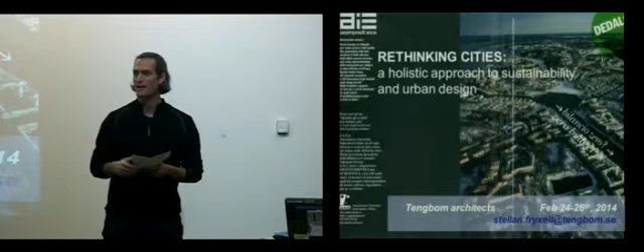One of the premier projects that many of us who do urban design and sustainable urban design look at is the Hammarby project, south in the southern area of Stockholm, and he'll be talking about that today. He's been involved since 1997. The project's still somewhat ongoing and has been nationally and internationally awarded, and is one of the benchmarks of how you do sustainable urban design at a kind of district level. So he'll be talking more about that today.

He's worked throughout Sweden, Norway, the UK, and is doing work right now in Russia, or has done work in Russia, and is doing work right now in China. He's the editor of a white paper on rethinking cities from the International Federation of Consulting Engineers. I think he'll be talking a little bit about this. An unbelievable, impressive list of awards, which I will not go through here, but national and international awards.

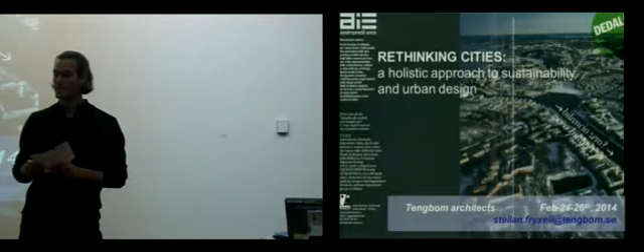You turned on the light.

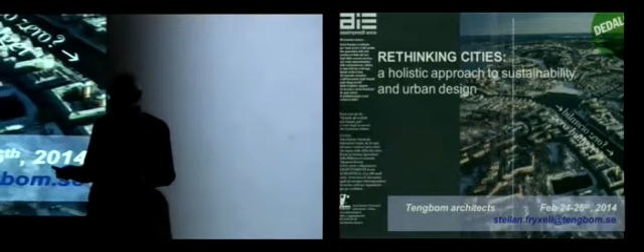I'm going to run through a presentation with slides about Hammarby, but also about what we are calling the urban toolbox, and a little bit about China, and we'll see if I can keep this together or not. But anyhow, it's a lot of slides.

This is a front page of an Italian magazine. I think it's a contractors magazine. And it's about Hammarby. And this is the nice poster. I'm very proud of this one.

A few words about Stockholm and Sweden. We are high up in the north. And as we are high up in the north, we have to plan. Otherwise, there will be no Swedes. So we are at the level of Anchorage or something. So it's a difference from here.

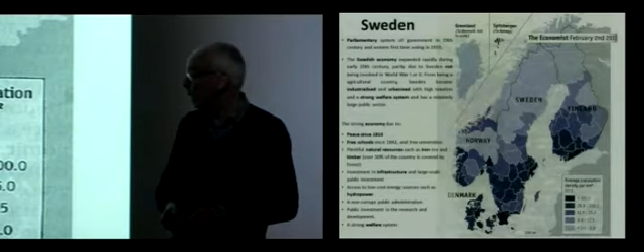Sweden is fairly large when it comes to area, has 9.5 million inhabitants. Almost 2 million inhabitants has immigration background. And there's one thing to say about Sweden: we have had peace since 1814. This is remarkable. This is lucky. We have natural resources, forests, mining, etc.

And Stockholm is located here. I'm coming from Tengbom Architecture firm, which happened to be the oldest firm in Northern Europe, as maybe there is a UK firm older. We are founded in 1906. So it's taken a while to become 550 architects.

Professor Tengbom designed a lot of prestigious buildings in Stockholm, and one of them is the concert hall of Stockholm, where the Nobel Prize ceremony is every year.

The biggest project Tengbom is working with is this hospital project, New Karolinska, which is the biggest hospital project in Northern Europe, and we do 50% of the design. And that is together with the other company, White, which is our size.

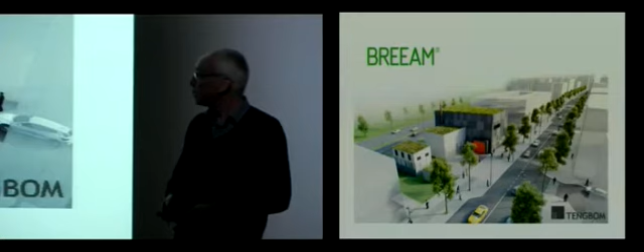I'm working as an architect and urban designer, and I'm responsible for the design of this little industrial building, which is a BREEAM certified building. It contains equipment for vacuum transport of garbage, and it has a green wall, for instance. It's a lot of paperwork with BREEAM, which is British, but there is no similar system in Sweden. This is a plan showing the equipment we are keeping in this building. It's under construction, so that's one side of sustainability.

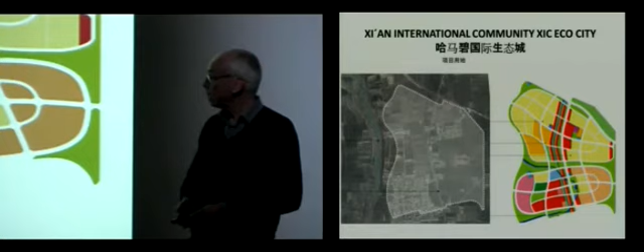I'm working with this project right now in Xi'an, the first capital of China, the terracotta city. It's 2 square kilometers big, the same size as the Hammarby project. I'm engaged with an organization working on the SymbioCity concept, which is another way to express sustainable city. There are many ways to express it, and there are brochures you can download under symbiocity.org in English.

I'm a member of the International Federation of Consulting Engineers Committee on Sustainability. FIDIC is the organization, and it organizes companies in 95 countries. We have done a report about sustainability called Rethinking Cities. What we are saying is cities are very important and can contribute to the climate issues we are facing.

Why rethink cities? There's a lot of figures about cities, so I'm not going to tire you with all of them, but a few anyhow. Almost 200,000 people are moving into cities every day globally, over 40,000 only in China. Cities are much more on the agenda, and we have a lot of problems with this. Cities cover about 2 or 3% of the land area, but use 75% of the energy and emit 80% of the carbon dioxide, which is a problem, but also a possibility to organize cities better.

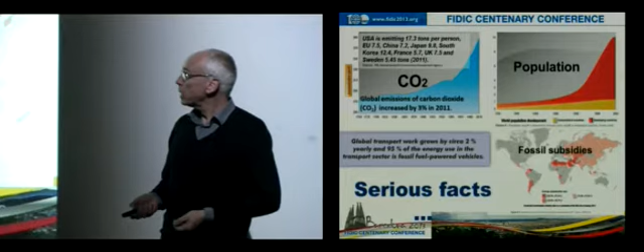Carbon dioxide is still growing despite the discussion we have. The United States emits a little bit more than 3 times more carbon dioxide per person a year than we do in Sweden, and there are reasons for that—it has to do with generation of electricity, but also with cities. I'll come back to that. Sweden emits about 5.45 tons per person a year, which is too high, but internationally it's low. China emits 7.2 tons, UK about 8 tons, etc. Greater Stockholm is emitting about 3.4 tons or something, but you can't compare a country with a city.

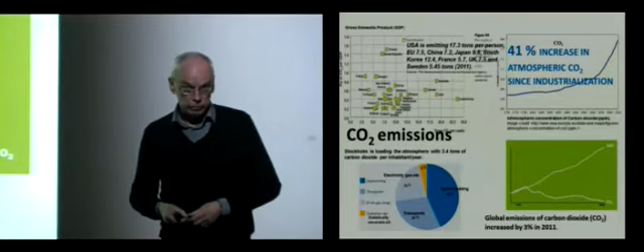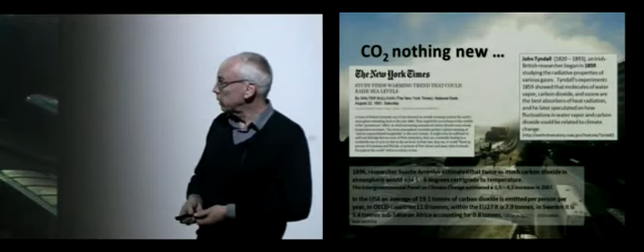This focus on carbon dioxide is new on the media agenda, but it's not new at all, really. In 1859, a British-Irish researcher started to talk about a connection between carbon dioxide in the atmosphere and the temperature. There was an article in a magazine in London in 1896 by a Swedish researcher about the connection between carbon dioxide growth in the atmosphere and the temperature. He overestimated the rise of the temperature, but still he had some points. This is an article I found on the internet, from the New York Times in 1981, saying a study finds warming trends that could raise sea levels. So this is nothing new at all.

How much oil do we have? When we started the Hammarby project, which I'll come to later, a barrel of oil cost $20. Today it's about $108 or $109. And ten years from now, what do I know—it would probably be $200 or something. So we can't rely on cheap fossil fuel, even with fracking.

I read this, and it's not very difficult to read—it's the IPCC report from September or October. It has a lot of facts about this. I can recommend it.

Another thing that has to do with cities: infrastructure investments are going down in many countries in Europe, including Sweden. I don't know about the US, but there might be the same thing here. At the same time, infrastructure can help us work better with the climate. This is what the UN Environmental Program calls planning resource efficient cities—that's their approach. Symbiosis city, sustainable cities, smart cities, resource efficient cities.

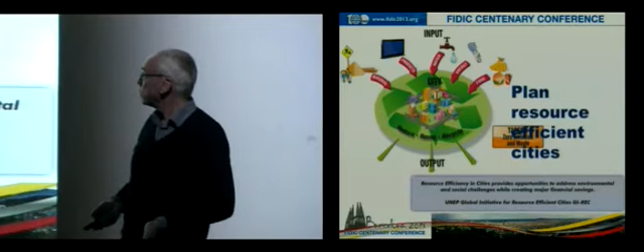But Sydney and Melbourne and other cities are very much into fossil fuel and emitting carbon dioxide. It's very beautiful to have a house of your own, two cars, and almost walking distance into the CBD. But that's not possible, not for many.

The FIDIC report, the Rethink Cities, and the work that we are doing in Sweden, we could call it a holistic and integrated approach to planning, where we combine urban design, infrastructure development and coordination, and environmental performance. I'm going to show what I mean with that.

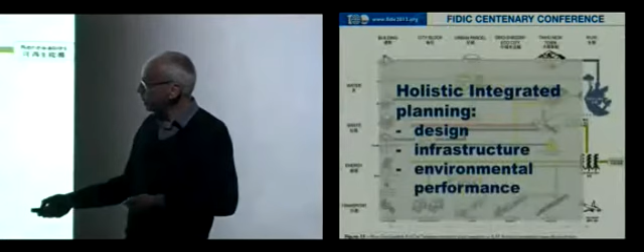If we're talking about sustainability, we have the ecological, social, and economical functions. We know that. And if we look first to the ecological one and to cities, I have a list of 10 different toolkits here. That's the urban function in itself, not only the building, whether we have green buildings or not. It's the urban function. It can be efficient, it can be beautiful, it can be energy consuming, whatever. Cities are very different.

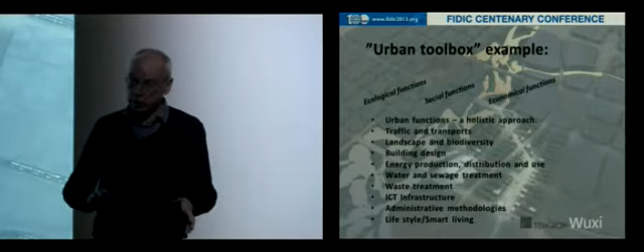Traffic and transport, that's obvious. Landscape and biodiversity has very much to do with urban function. Building design, we're working a lot with this, but in Sweden we are renewing the building stock with new buildings at 1.5% per year. So it's going to take many years to renew it all. Of course, we are refurbishing buildings as well.

So to do green buildings is not enough, we have to work at this level as well. Energy generation, distribution and use, water and sewage treatment, where sewage can be a resource, waste treatment, information communication technology - there's a strong movement from companies about this right now, administrative methods and lifestyle and smart living. That's 10 different items in my urban toolbox.

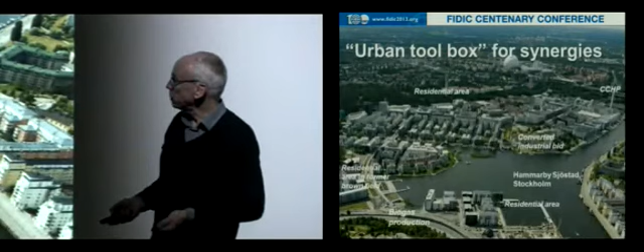I'll give you some examples. Hammarby, I'm coming back to that. This includes more than nice housing, like green bridges, biogas, etc.

Which is interesting. Building design, that's green building, it's obvious. The CH2 building in Melbourne, which houses the planning department of Melbourne, is using like 15% of a normal office building.

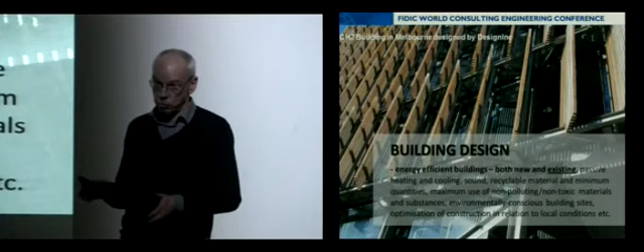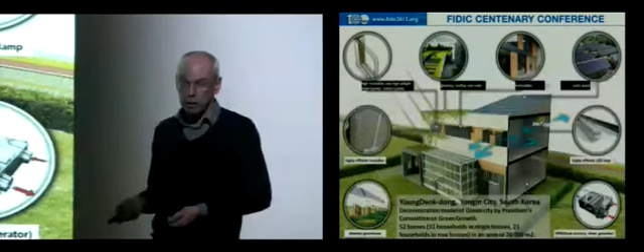This is from the President's Office of Green Growth in South Korea. BedZED in London is similar to this, same theme. There is a lot of rating and certification tools.

I mentioned BREEAM, you've got LEED here. There are about 250 or 300 of those around the globe, which is problematic, and sometimes they are very complicated to use. But they bring up those questions into the boardrooms, which is very important.

And BREEAM is the biggest one, and then I think there came the French one. LEED is the most well-known one. And then we have also good architecture - this is a Danish example, it's a part of the toolbox.

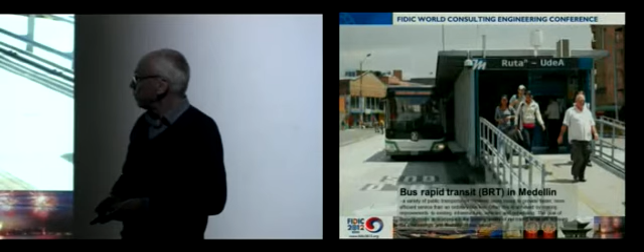Traffic and transportation and public transportation - this is the metro system in Stockholm, running trains on green electricity. This is a BRT system, you've got it here as well.

And this one is from Medellin, the former drug capital of Colombia, it's a nice city today. And this is from Santa Monica, light rail under construction from Colorado Avenue. It's very nice to see that.

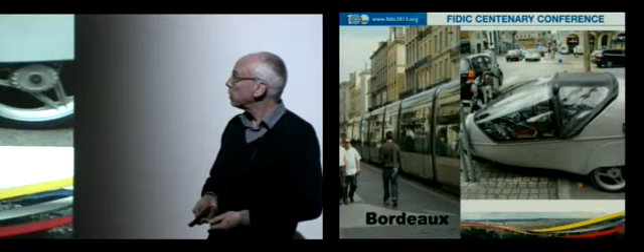And many examples coming to vehicles, there's many examples. This is more for fun because there's two bikers sitting in here. So it had been good yesterday where we were biking around.

And a lot of vehicles. This is also from Bordeaux. This is a Renault. This bus is charged with the power at the end stops, stops there for 10 minutes, and then we can make it to the other end stop. So we're going to see more of this.

This one is running on biogas from the former city dump in a small town in Sweden.

Bicycles, that's central here in Eugene. This is from Amsterdam.

I'm impressed of China in many ways, and one is the proportion of electrical two-wheelers. There's many more than it's possible to see in the United States or Europe. And also, it's one reason they are popular - you can charge this in your office and make your employer pay for the fuel. This one cost about $200 or something if you buy it in China.

Bike sharing. I don't know if you have it here. Yes, yes.

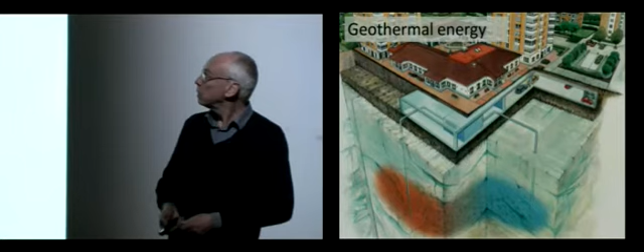Back to China, back to Duyun in southern China. This is from my hotel room - solar thermal panels all over. You can't find a country in a Western country with as many solar thermal panels as you can find in China. It's very impressive.

Water and sewage. This is a plant in Stockholm. This is many other places, also in China, where the sewage is used for biogas.

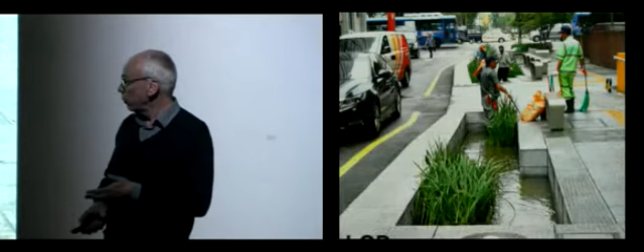Local treatment from Seoul. And this is Melbourne, the circulation of grey water.

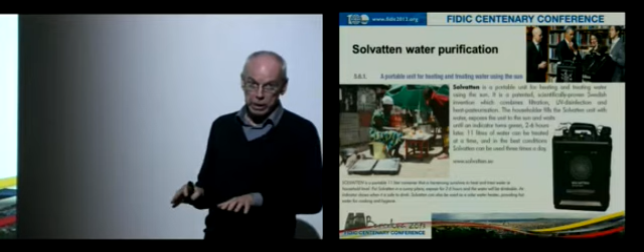This is an interesting innovation. Mr. Obama, he visited Stockholm a few months ago. He asked if he could visit Hammarby, but out of security reasons, that was not allowed. But he didn't see the system, he saw products instead. This is a small container that is purifying water into drinking water using the sun.

This is Swedish Prime Minister.

Waste, another part of the toolbox, where in Sweden it's not allowed to put household waste on landfill. So we put about 1%, and this is going to be taken away. Half is incinerated and half is recycled. I don't know if this is an accurate figure for the United States, but the differences are still there. And you have to bring in those questions also when you are planning for new areas, also existing areas.

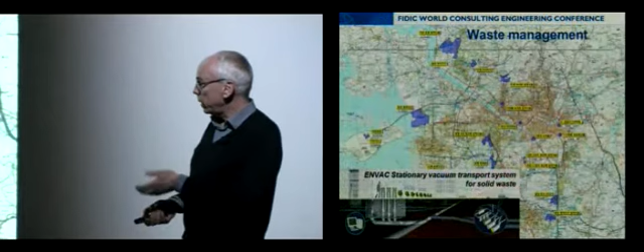The waste and transport system is also used in Seoul, for instance. 300,000 households are using the waste and transport system for garbage, for waste in Seoul. But it's a Swedish system - they have 80% of the world market, and it exists on Roosevelt Island.

But you don't need this system to sort garbage. It's a lot of other things. And not to forget the informal work with the waste - to sort waste is very important.

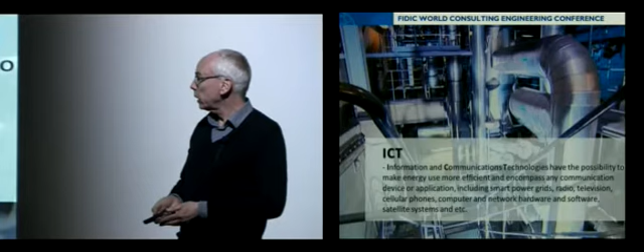Back to the toolbox, information and communication technology. That can steer and guide a lot how we are using smart grids, etc. And this is surprising, at least for me.

EU is promoting smart cities, and also big companies like Samsung, IBM, Siemens. And in their world, smart cities and sustainable cities are a little bit the same thing. I don't agree, but it's an important part of it. Also in Japan.

Administrative methods to integrate, to have holistic and integrated planning methods again, bringing people with different competencies together, and also public and private partnerships working together. Because there is no one single expert who could combine and develop the sustainable planning and design.

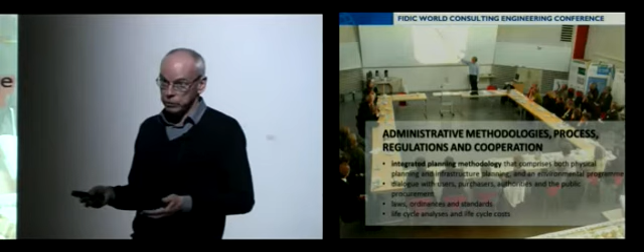This is to engage the people. This was a public hearing - I made a presentation in St. Petersburg about a new residential area. And I was the only non-Russian-speaking person at this meeting, and they were quite angry with the politicians and the city architect, but very polite to me, and I'm glad for that.

So that was about the urban tool, and I'm going to show that we are working with this in China, in Wuxi, but then also about Hammarby. This is also like in Xi'an, a 2 square kilometer large area. It takes 29 minutes by speed train from Shanghai to Wuxi, and it takes more than 29 minutes to buy the ticket if you don't know how to do it. But it's very impressive. We are working with local partners in China, and we're also working with the engineers in Sweden.

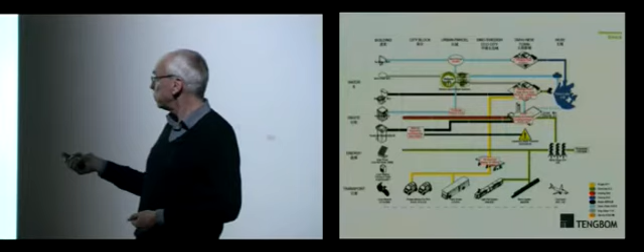Or they have solar panels here, and it should be delivered to the grid, etc. And also the environmental performance standard. So those diagrams are telling how much energy a certain building, or how much energy you can use per square meter per year, for instance, or how much of the roof should be covered with photovoltaic panels, or should be green roofs, etc. It's a good way to sum it up.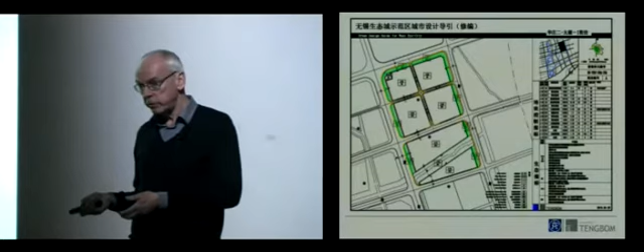Also, part of this is more formal, detailed plans, the Chinese zoning, which is not very different, I think, from the American way to make zoning regulation. It's different from what we're doing in Sweden. And this is the Chinese part, and this is our part, how we try to organize the buildings in a sort of block structure.

And in China and India and many other places they're building residential buildings in a beautiful park landscape in big blocks. We would like to divide it into smaller blocks, housing not too many families around a shared space, etc. It's not easy because there's other regulation, building design regulations, in China, also in Russia.

So this is an example from Wuxi, how the master plan was looking, and this was our proposal. It's the same density, but another scale.

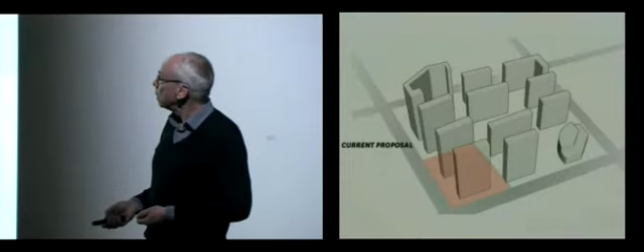So I'll talk a little about Stockholm and Hammarby, and how the Hammarby project is integrated into the city. Stockholm became the first green capital of the EU in 2010. I think it's Hamburg now. Oh, it has been Hamburg, and I think it will be Copenhagen next.

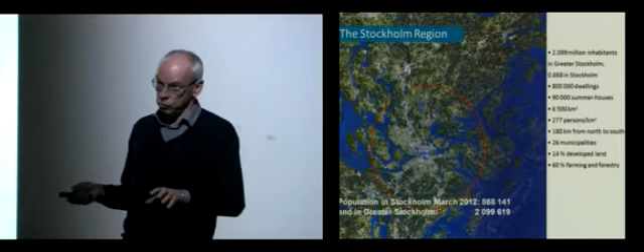Greater Stockholm has 26 municipalities and a little bit more than 2 million inhabitants. And the municipality of Stockholm has almost 900,000 inhabitants. Stockholm is organized with the old town, with a big royal castle, and the inner city from the 1800s

up to 1920, and then the older suburbs, which were reached with light rail traffic, and then came the metro system out to those suburbs. So that has formed the city of Stockholm, together with the islands and the water, Lake Mälaren and the Baltic Sea. The Baltic Sea has no tide, but it's still a part of the sea.

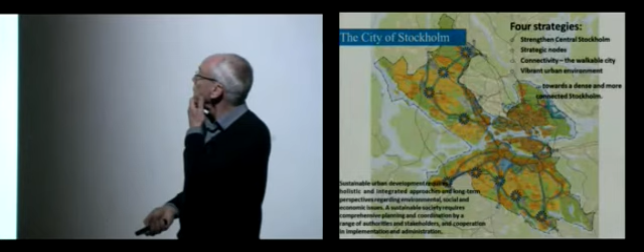And this is the walkable city, an overall plan for the municipality of Stockholm, how to densify certain areas. Here's the Hammarby area, which is an extension of the inner city. This is the inner city, Hammarby again, and this is a commuter railway tunnel under construction under Stockholm right now.

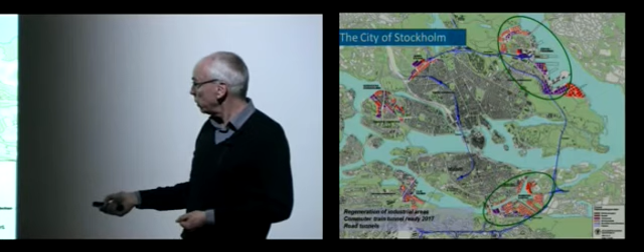And this is another area which is called the Royal Seaport, Norra Djurgårdsstaden, which is a former industrial and harbour area. And this is also a former industrial and harbour area. It was not well used before. Today it's well used.

This is part of the commuter train construction, together with 2 metro lines. It's amazing to get this together. It will be open in 2017. This is the Hammarby area, this is the inner city again, and this is an extension. This is how it looked in 1997. It's 2 square kilometers, including the water here.

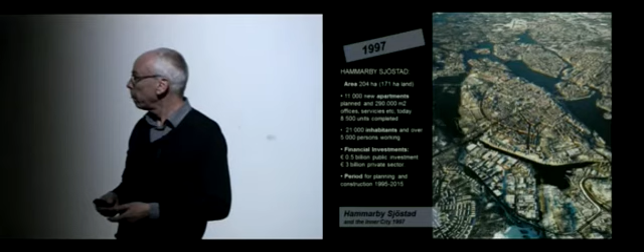The land was owned by the city from the beginning, and the work and design has been organized by the city. Like 5 or 10% of the investment has been done by the city of Stockholm, but the rest has been invested by 33 different developers and a number of infrastructure companies operating here. Those companies are here because they think this is a nice business to be in, they would like to make money. So it's really a public-private partnership, where the private side is contributing more than the public side is doing.

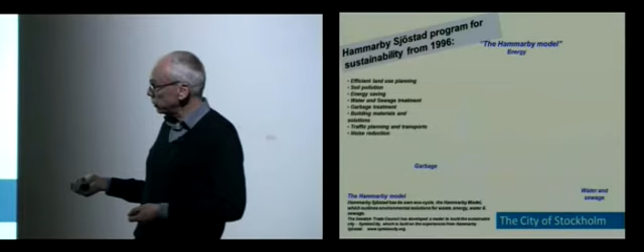97 again. Here is something missing. It's about the sustainability program, which was part of the start of the planning and development of Hammarby. It was approved by the City Council in '96, and by that time we didn't speak about climate risk. It's about synergies between energy, garbage, water and sewage, and also about land use, energy saving, and traffic planning, etc.

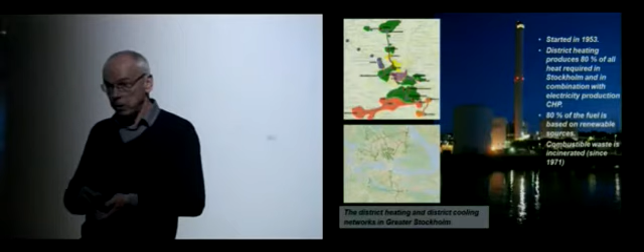I mentioned the district heating. This is Greater Stockholm, and this is over 100 kilometers from here down to here. This is a number of grids that have been connected together. 80% of all housing in Stockholm is using the district heating system, and 80% of the fuel we are using in the municipality of Stockholm is renewable fuel, which is very much sorted garbage, but also biomasses. This is a co-generation system, so the district heating company is making electricity and district heating at the same time.

So it's co-generation. There is also a district cooling network in Stockholm, I think the second largest in the world, and that's with the climate we have in Stockholm, where the average temperature is 7 degrees. Both those systems are commercial, so the companies running this one and this one, a number of companies here and one company here, are operating commercially. They are making money on this.

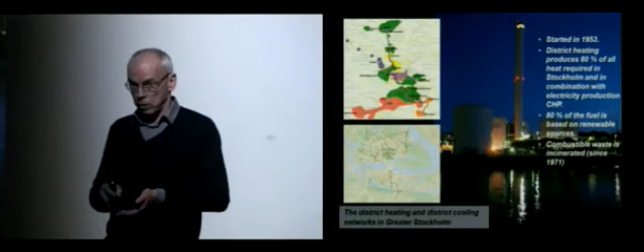This is the reason we have rather low carbon dioxide figures in Sweden: the generation of electricity, which is very much hydropower, but also nuclear power. I don't recommend nuclear power, but that's a fact. Another important reason is the district heating network we have through Sweden. We have had district heating operating in Stockholm from the early 50s, and I think the district heating system in New York is older than that.

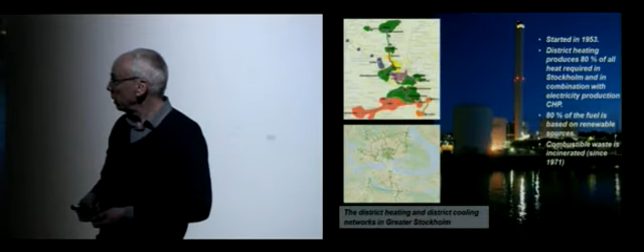We have been incinerating sorted garbage in Stockholm since 1971, so it's a fairly old technique. This is a plant in Hammarby, which operates with heat pumps and biomasses, not garbage, so it's located in the area.

Another reason for good figures is that we have fairly good public transportation in Stockholm and in Sweden. In Greater Stockholm, we have 100 metro stations for a population of 2 million inhabitants. It started operating in 1950 and has been extended since then, and it's fairly old, but the trains run on green electricity. We also have over 50 commuter train stations. Compared with Beijing, which has 440 metro stations for a population of 20 million, we have more metro stations relative to population than Beijing or Seoul has.

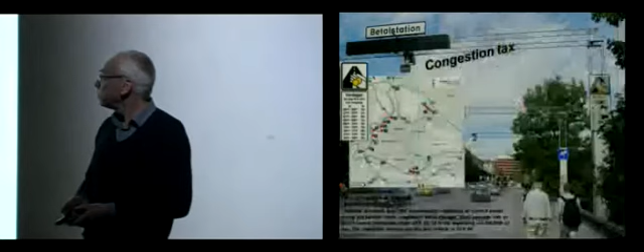We have a congestion fee in Stockholm, like in London, Oslo, and Singapore. We had a referendum about this, and the majority of people in the municipality of Stockholm living outside the border still voted to pay a fee to get into the city with a car. That reduced traffic by 20%, and it also reduced the conflict between professional drivers and private drivers. The professional drivers like this system, it makes their job faster and safer, and it also generates resources for new investments in public transportation and road traffic.

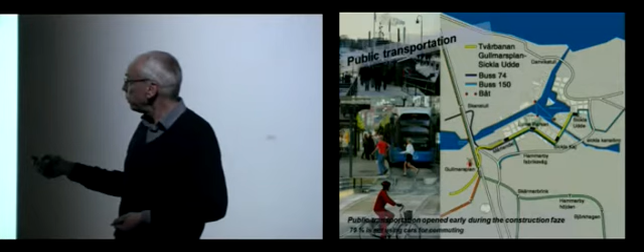In Hammarby here, we have a light rail extended into the area as people started to move in. The light rail also runs on green electricity, and it's possible to walk over from the light rail to the metro system here at the edge of the area.

More about energy. We have a sewage treatment plant just outside the Hammarby area. The sludge from the sewage water, which is a kind of biomass, is put in cylinders for an anaerobic digestion process, which makes biogas after it's refined. There's CH4, the same chemical as natural gas, but during this process it's binding carbon dioxide, so it's a loop with the carbon dioxide. About 170 city buses in central Stockholm run on biogas from the sewage water, so we don't have to import it.

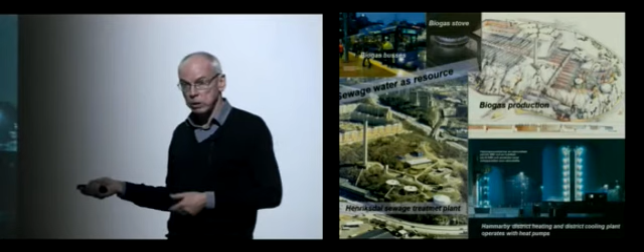Sewage water is also warm, at 17, 18, 19 degrees, so there's heating in it. With heat pumps we take out heat from the purified sewage water and put it back into the district heating network, so we use it. We also put some of the nutrients from the sewage water into composting, but that's not very important. The important thing is that we use the sewage water as an energy resource.

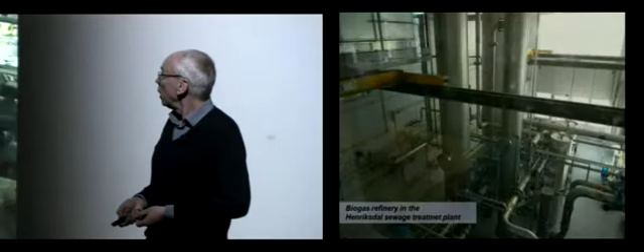The biogas is refined at the sewage treatment plant and sold in Hammarby and other areas in Stockholm. There's carpool or car sharing in Hammarby and other places in Stockholm, and many of the cars run on biogas.

You can charge your car, your Tesla if you've got one, but you should charge it with green electricity, of course. There's a market for green electricity in Sweden, so I buy green electricity for my apartment and my summer house. I don't know if it's available in the US. It is. That's good.

To make it easier to sort garbage in Hammarby, we have a waste management technique with a stationary vacuum and transport system, the ENVAC system again. You don't need it to sort garbage, but it helps. It's automatic, with a computer in the terminal. This can be up to two kilometers long, and with fans it's vacuuming, transporting garbage from one chute, one pipe, at a time. The computer can tell that a chute is full and needs to be emptied, and at a speed of 70 kilometers per hour the garbage is moved into the right container.

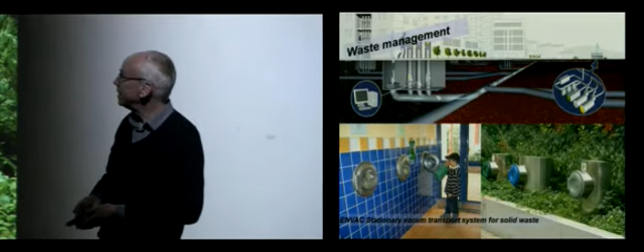White goods are installed by the developers from the beginning in the apartments in Sweden as a system - not all of it, but most of it. And in Hammarby it's energy classified from the beginning.

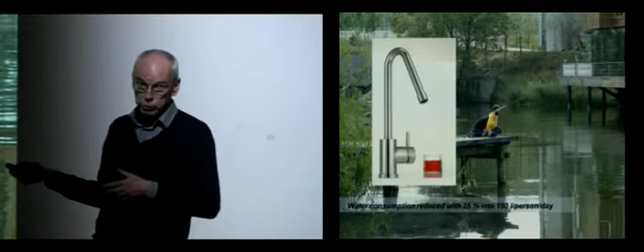Low energy housing: we have, by tradition, fairly low energy housing in Sweden because of the climate. We have some winter nights in Stockholm with minus 25 degrees, so we need well-insulated buildings. We've been working with double-glazed windows since the 1700s, so double-framed. I have triple-glazed windows in my summer house - that's what you buy at the market.

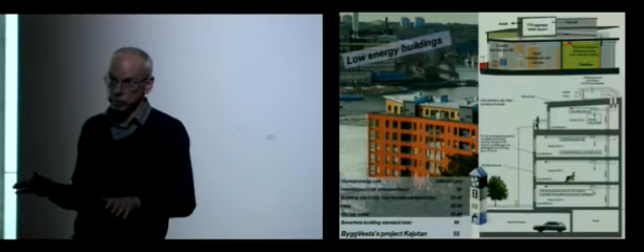This building here uses, in reality, about 55 kilowatt hours per square meter a year. It has no radiators because it's well insulated, but it has a heat recovery system taking heat out of the exhausting air and putting it back into the fresh air.

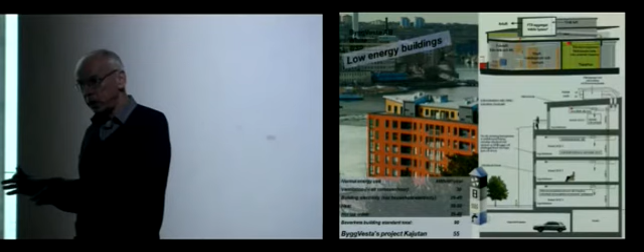There's more to be done here, but as we are constructing a few new buildings, we have to deal with the infrastructure systems. Of course, we have green roofs, some photovoltaic panels, some solar thermal panels in the Hammarby area. But the infrastructure is the answer to the energy, carbon dioxide, and resources in Hammarby, along with it being a compact area with well-insulated buildings.

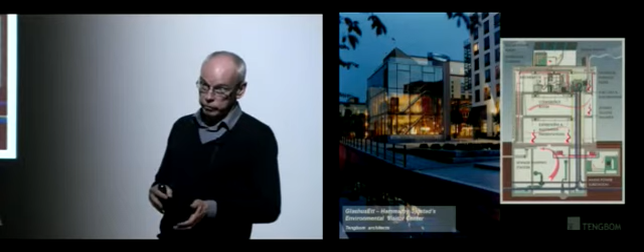Part of the environmental program is the visitor center, or environmental information center, GlashusEtt, meaning glass building number 1. This one has photovoltaic panels. They had a machine that could divide water into oxygen and hydrogen, and another machine that could store hydrogen together with some metal, which I've forgotten. It used to have a fuel cell machine that could produce electricity for the building. It had heat pumps in the basement and double-glazed windows, double-glazed facades, and a computer running the building. It's a test building with a lot of fun technique.

But the answer to sustainability is maybe not as complicated as this building shows - and I can say that because I'm the architect of this building. So I have the right to say so.

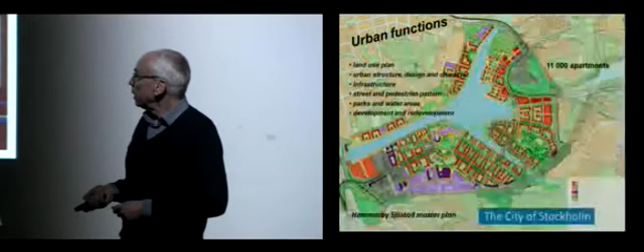We have the environmental program for Hammarby, and then we have the master plan for Hammarby, which is the second important document. The Hammarby urban design is based on the North European inner city design.

The traditional inner city has rectangular blocks with streets on 4 sides and a number of different buildings in one block. Here it's more like 1 or 2 buildings in a block, or 1 or 2 developers in a block, and the streets are on 3 sides, mostly around a block. Then there is a local small park adjusted to the blocks, so those 8 blocks are surrounding this small park. So that's the difference from here.

But it's good access with car to every entrance door here. And then there is a view from this courtyard or from the apartments here up to the water, which is very popular for the people living there to have this.

It's not that more people or more families living in a block here have a feeling for the other. If there is a family with children, small children, they have a feeling for who the other families with small children are in the same block. So it's about 150 or 175 apartments. And if you're a retired person, you have a feeling for who the other retired persons are. So there is a sort of community feeling here.

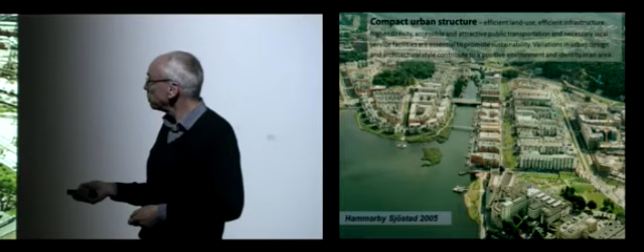This is 97, and this is the same site 8 years later. And there has been about 20 different developers engaged here in this picture.

The size of the building is from 5 up to 8 stories. And here's the park, and access on 3 sides here.

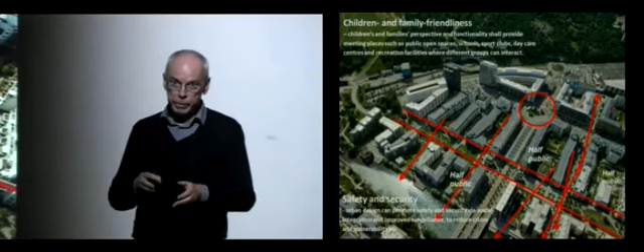And there is a sort of hierarchy here, from the private apartment, the half-private balcony or half-private staircase, to the half-public or semi-public courtyard, to the public street or the public park. So it's sort of organization.

And there is more or less 2 buildings, 2 and 2, with some connection here, making a block. And there's a quiet side here, and a traffic side here. Most bedrooms are oriented to the quiet side. So there is a grammar in this.

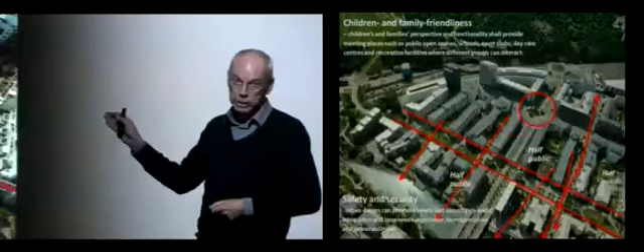And if you have a child, the child might be able to move to another courtyard and see a friend there at a certain age. So this is a family-friendly oriented design, at least I think so. And there is about twice as many families with children living in this area compared with other areas. So it's really, it's many babies, I can tell.

And this is how the area is organized. It's one main boulevard, or 2, there's a spine through here. And there is a number of dead-end street cul-de-sacs here, with very little through traffic here or here. So this is a fairly safe, traffic-safe area.

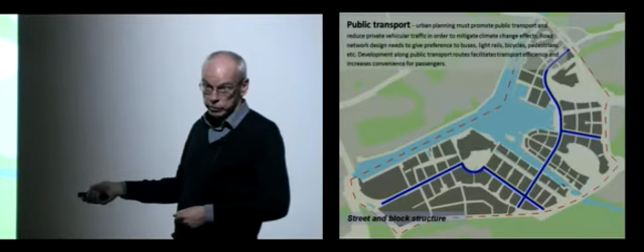And this is another one, enclave, and so on. So it has to be organized. And again here, I think it's 33 different developers constructing there, and 30 different architecture firms.

This has trees in every street. This is the main boulevard, 37.5 meters wide. It happened to be that. So there's 3 meters of sidewalk, and there is 2 cars, 1 tree, 2 cars, 1 tree, and there is a bicycle lane, and a vehicle lane, and a row of trees, and buses or light rail in the middle. And they happen to be 37.5 meters, which is a fairly traditional boulevard.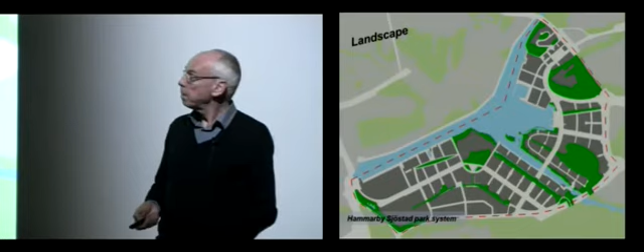And this park here also happened to be 37.5 meters wide. I can't tell really why, but it was sort of a challenge to make this park the same proportion as the boulevard, and it worked. They are very different, but still the same proportion.

Former industrial quay, pavilion, boardwalks in the reed. Otherwise, the shore here should be privatized, which it may not be. They are very popular to walk around.

Quality is more important than quantity when it comes to public realm. And those details, this is a stormwater gutter. It's very important.

And not very expensive. There's a slalom slope next to the area. It happened to be there. This is not from this year, we have had very little snow this winter. There's another part of the area organized after the same principles.

There's a garage under here, and there's a skylight down to the garage. It's a shared space.

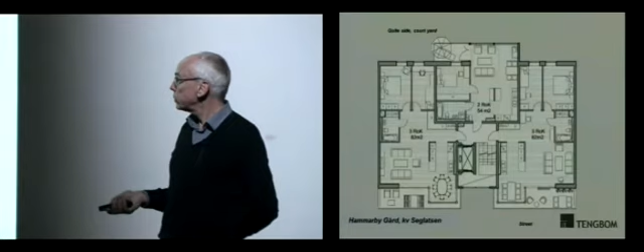This is how we organize apartments. There's 3 or 4 apartments around the staircase, and this is the street side, and this is the quiet courtyard side, where we have the bedrooms and the smaller apartments facing the quiet courtyard. We have different fire regulations, so I don't think it's possible to exactly design like this in the US. There is also a bigger apartment than 2 beds.

This is the service structure, so there is not really any main square in the area. It's a boulevard, which is the spine. And there are over 100 different cafes, restaurants, whatever you find. Also, those are schools, and those are daycare centers.

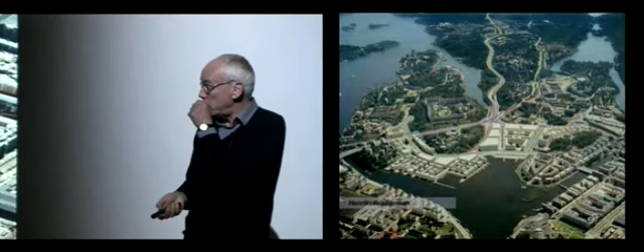Nine-year school, former industrial building, partly turned over to residential use here. This is also part of the plan. I don't know if it's going to be realized or not.

There's a road into the city with a lot of traffic, a lot of traffic noise here. According to the plan and according to the calculation, it's possible to construct a tunnel through the hill here, through the rock, and have a quiet area here, and pay for the tunnel with the new value of the land, at least in theory.

This is completed or under construction, this one, but not the edge here. It's also rectangular blocks, but another form, a little bit higher density.

It's about 115 apartments per hectare, or 130 apartments per hectare or something. If you have nice water views as here, it's not possible with the density. But there are very few towers into the scheme here.

And this is a study I'm working with now. I'm now and then working with the Hammarby area. I was a part of the planning team for Hammarby. So I was hired as a private consulting architect, and got a desk at the city planning department and worked with the team there.

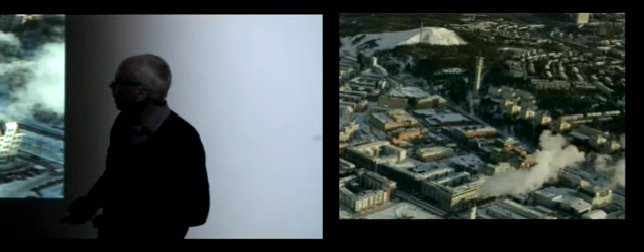Now I'm doing a study to build over this road with new residential. It's secret, so don't tell anyone. It's not public anyhow, it's not secret.

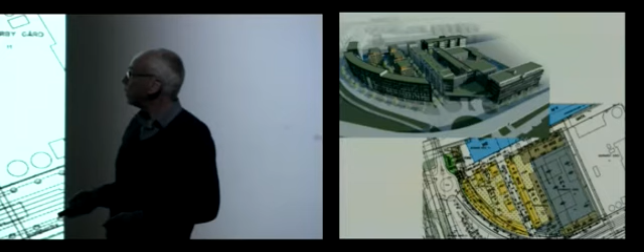And it's also even more compact than the previous one. It has been a lot of meetings, but if you organize this with a project organization and bring in the right skills into this, it's very efficient.

The area is divided into sub-areas, and the developers here, 8 developers here or six developers here, they are working together with the city and together with their architects and landscape architects and traffic planners and environmental specialists to do the design together. So it's not right to give too much power to the public sector, and it's not right to give too much power to the private sector, according to my experience. Working together.

And also there is a creative process between the different developers and between the different architects in those teams. And those teams are working together for maybe 1.5 years, start with a fairly rough sketch, and end up with drawings which are almost ready to take into a building permission application.

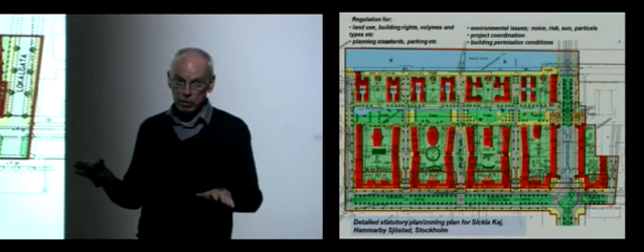This is a zoning plan as we do it in Sweden. It's an agreement between the city and the developers, but also between this developer and that developer. So they're very interested in what the neighboring developer is doing. I think there are sometimes discussions between the developers that the city isn't aware of, but that's part of the process.

Also, there's a generous attitude to share information. The design guidelines, which are used for approval of building permissions, are made together in those teams. So that's also part of the agreement between the developers, the city, and the politicians. The zoning plans and design guidelines are processed and approved by the city council or the planning commission.

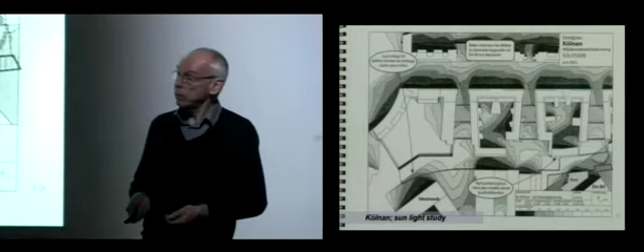Coordinating architecture, building materials, colors, sun and shadow studies, because we're high up in the north. Landscaping is coordinated, which is very important. Pipes and trees are coordinated, though not always constructed where they're coordinated to be. Traffic noise analysis. Hazard risk factors, transports.

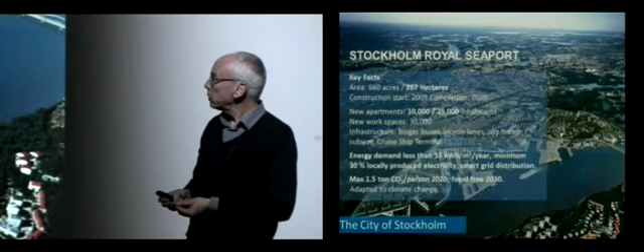This is the Royal Seaport. This is the newer Hammarby area in Stockholm. There's more ambition coming to energy performance for the building, sorting garbage, and smart grids. But in many ways it's similar to the Hammarby area.

And here's also a district heating and district cooling plant operating with heat pumps from the water here, which is part of the Baltic Sea, and also a program for the smart grid, because we are generating more electricity than we're using. So with the smart grid solution, we can have a better balance and generate less electricity.